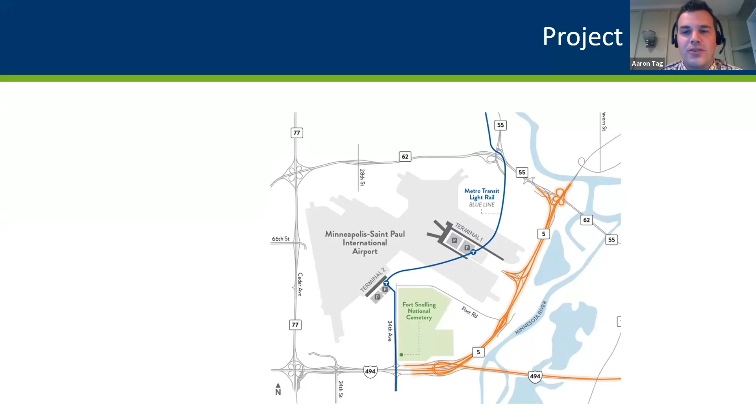This is on Highway 5 between 494 up to the Minnesota River. On the northern section of this project, we're doing what we call a concrete overlay, or reconstruction, of Highway 5 in both directions. This is a long-term fix. This will put down new pavement that will have long longevity. Overall, it'll last 40 to 50 years, and it'll be a good couple decades before we really have to be back in this section doing preservation work. And when we do that preservation work in the future, it'll be much less invasive than what we're doing this summer.

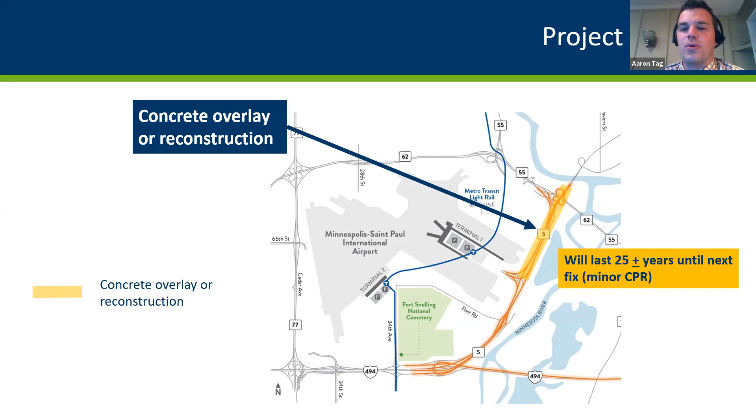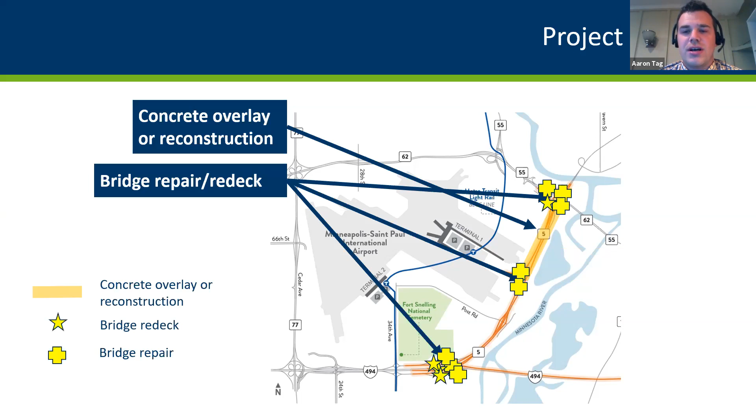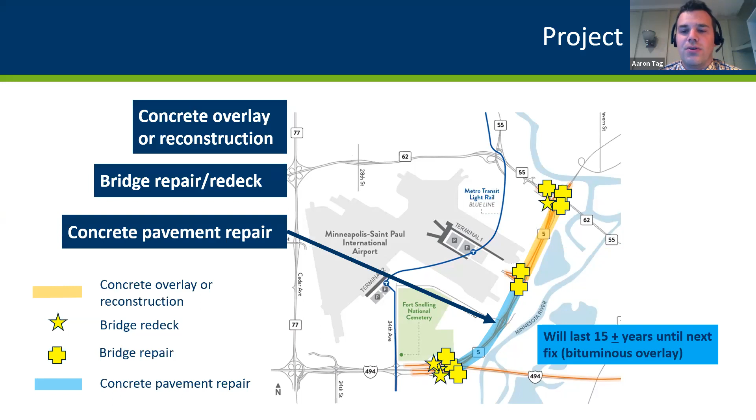We also have a lot of bridges we're working on along this corridor — 12 bridges that we're either doing repairs on or redecking. Redecking is when you take off the entire driving deck of the bridge and replace it with an entirely new one. On the southern end of the project, we're doing what we call concrete pavement repair, going out and making spot repairs to the concrete pavement that's out there. This will give us another 15 years plus or minus of pavement life before we have to come back for another preservation project, which will be a bituminous, or asphalt, overlay over this section.

As of last night, we have moved into the second stage of our project. From a traffic standpoint, it will feel very similar to the first stage for anyone who has driven on Highway 5 over the last couple months. Eastbound Highway 5 will continue to be closed from 494 across the river. The change that occurred last night is that now, if you are headed westbound on Highway 5 across the river from St. Paul, you won't have connections to Highway 62 anymore.

So if you head across Highway 5 across the river, you'll have to go all the way down to 494 to detour back to where you were intended if it was on Highway 62. If you're on Highway 62 headed westbound, you'll need to go to the interchange with Highway 55, Hiawatha, and essentially do a U-turn and come back.

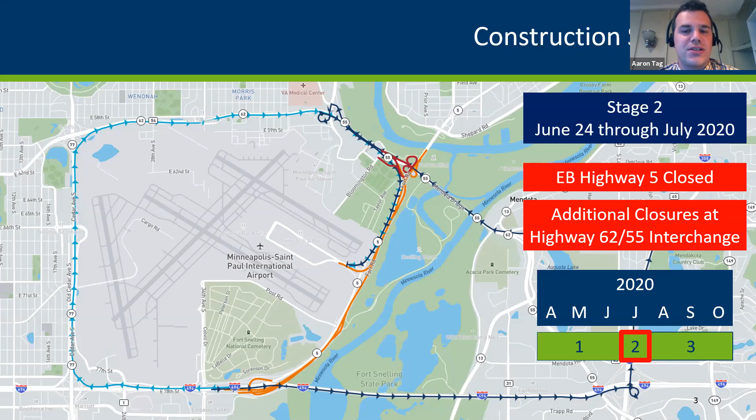The ramp from eastbound Highway 62 to westbound 5 will still remain open. This stage of the project is going to last about

5 to 6 weeks, lasting until late July or early August. Here's a couple recent photos from the project. On the left there is a bridge deck pour. So this is one of the bridges that is getting a redeck. You can see them pouring the concrete for that there.

And then on the right side, we have the concrete overlay. A lot of times when people might hear us talking about overlays, they might think of something we do more commonly, which is an asphalt mill and overlay, where we take off

a couple to a few inches of asphalt and replace that. With a concrete overlay, we are essentially building a new road on top of the existing road that's out there. So you can kind of see that in this picture there with the new 9-inch section of concrete on the right there that's white. And then on the left side of the picture there, you can see the old road bed that the concrete is getting placed on.

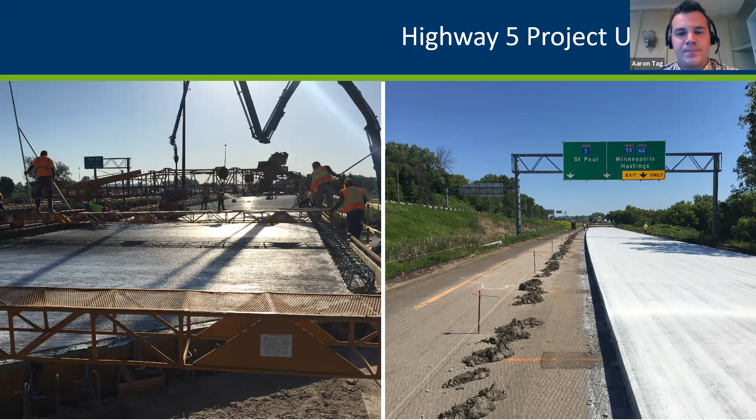As we move into that early August timeframe, we're going to move to the final stage of the project, stage 3. During this part of the project, westbound Highway 5 is going to be completely closed. So access will be changing so that eastbound 5 will be open. If you're going to the airport or leaving the airport, you will have to use eastbound Highway 5 for your access for the airport.

Another change that will be happening during this stage of the project is that if you are headed westbound on 494, you won't be able to access 34th Avenue. That ramp will be closed for one of the redecks. You'll have to go down to the next exit and do a U-turn, similar to what's happening up on 55 and 62 right now. Do a U-turn and come back to 34th.

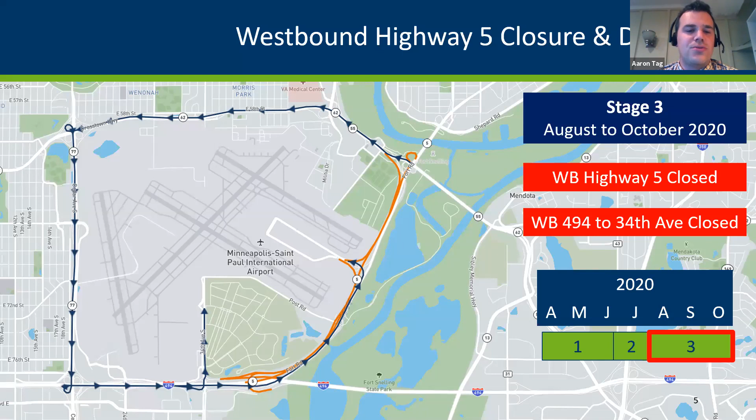So I kind of mentioned at the get-go that we really expected this to be the project of the summer, getting a lot of attention. It hasn't got as much attention as we originally thought it would, just because there's so much less traffic out there today. As we were planning the communications for this project, we were planning to tell people that they needed to give themselves an extra hour to get to the airport because of

increased volumes we were going to see on 77 and 62 and 494. So this is a little graph here. I got 3 of these. This one's Highway 62,

comparing volumes this year versus the same day last year, so in 2019. So you can see in the peak, we were down 70 to 60% down from our volumes in 2019. We've climbed back, so we're now more in that 20 to 30% decrease from last year. With this project, we were expecting those volumes on 62 to be a 30 to 40% increase.

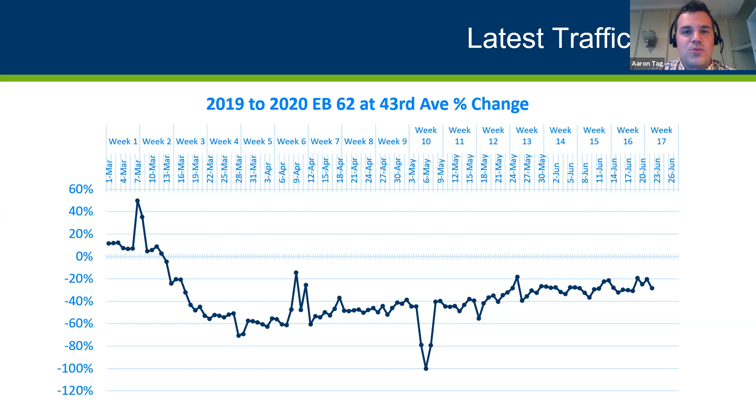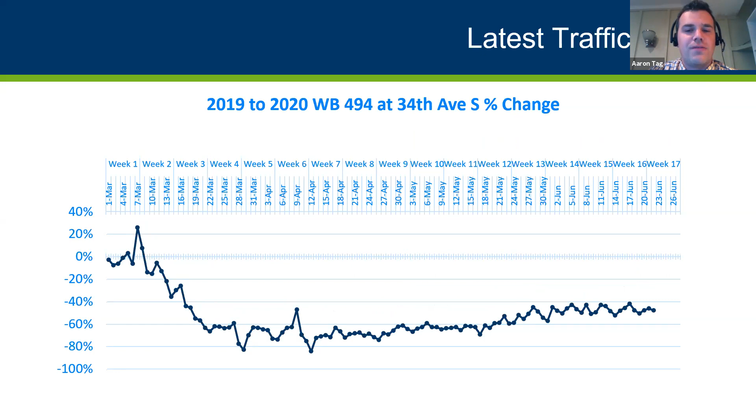So this is information for the project. You can go to our website to get the latest information, aroundtheairport.com. While you're there, you can sign up to get email alerts, get the weekly email on what is happening with the project and what you need to know. If you have any questions, you can always feel free to contact us through the website or use the email listed there.

And now Molly is going to talk about the 494 pavement and bridge project.

Thanks, Aaron. Yep, I'm Molly Kline. I'm a South Area Engineer at MnDOT, working on the 494 and 35W bridge project. So we'll give an update on both of those.

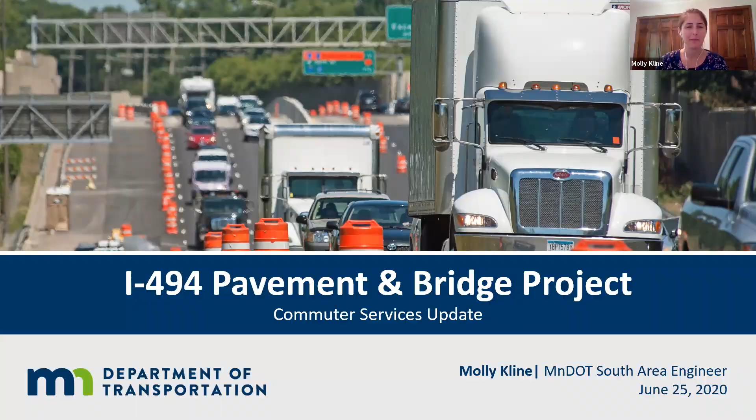So this project on 494 was actually a combination of 2 separate projects. Between Blaine and Hardman Avenue, we worked on last year, and that is now complete. So we added bridge work. We widened and resurfaced the Concord or Highway 156 bridge. We replaced those bridge joints. We added an aux lane on westbound 494, put up some noise walls, and repaired the pavement in that area.

So that work is now complete. And we are now working on pavement restoration or preservation on 494 between the Minnesota River Bridge and Hardman Avenue. That project includes resurfacing and replacing joints on the 494 and 35E bridges.

We are repairing the pavement between 3rd Avenue and the east side of the River Bridge. If you'll remember, that pavement was in terrible shape and really did need to be replaced. We're improving drainage in the area, replacing lighting, and we've added a turn lane, and we'll replace the signal at 494 and Pilot Knob. The benefits of these two combined projects are improved traffic flow and safety for commuters using 494 in this area. It extends the pavement and bridge life, and it improves drainage.

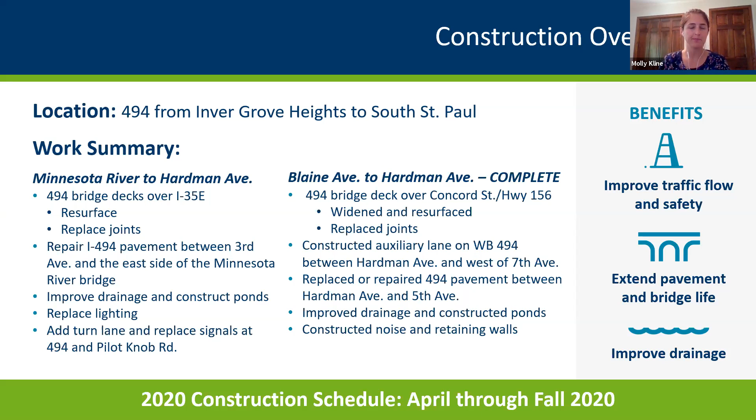Here are a couple pictures from that 494 job. If you'll remember, before we started the preservation work, the lane lines or pavement joints were deteriorating very rapidly. So for this pavement restoration project, we implemented what is called echelon paving, where we run multiple pavers in a single direction of traffic to eliminate those cold joints where the pavement comes together. This project did implement that echelon paving, and it eliminates half of the cold joints that were out there previously, extending the longevity of this pavement.

The photo on the right side of the screen is one of the bridge joint replacements. They actually cut out the joint and will replace it. It looks fairly scary in that condition, but it is being repaired and replaced, enhancing the longevity of the whole bridge, not just the bridge joint but the bridge itself, with that work.

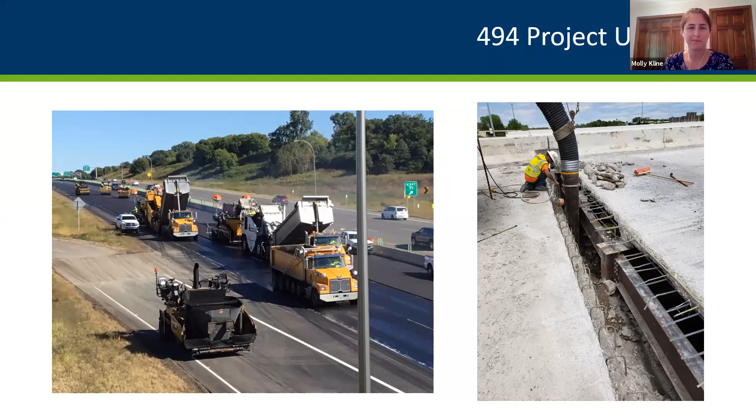So the remaining work—we got a lot of pavement work done last year. The one section of pavement that remains to be mill and overlaid is highlighted in green on this graphic, on the far west side between the Minnesota River Bridge and 35E. We will be coordinating very closely with Aaron's project on Highway 5 that he just mentioned. He mentioned that they'll be going into stage 3 here in August. As soon as that project transitions into stage 3, we anticipate working on the eastbound direction here. So right now we're tentatively scheduled for the first two weekends in August.

This section of pavement will require a full closure. There's also some drainage work that needs to be completed in this area. So the full closure will detour traffic on eastbound 494 to highways 77 and 35E. Again, we will not implement that work until the Highway 5 project is done using that direction as their detour route. Circled in red here are the bridges at 35E that continue to be worked on. We started that work last year and that will continue through this fall.

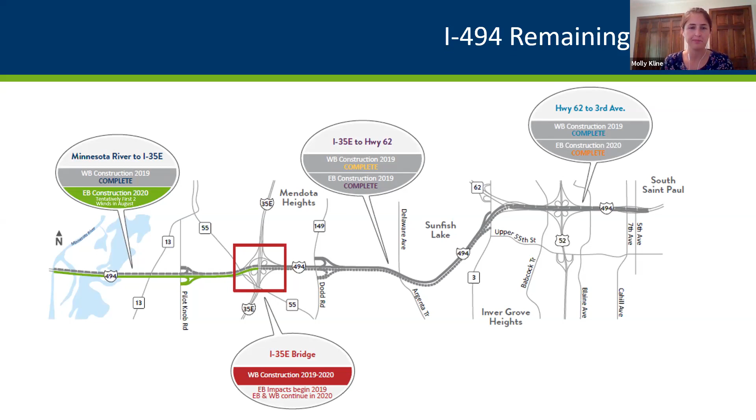On to the 35W River Bridge. With this project, we've partnered with Dakota County, Hennepin County, Bloomington, and Burnsville. We're replacing bridges and pavement from 106th Street to Cliff Road. This was a very big project—we started it in August 2018 and it will continue through November of 2021. It has a number of benefits, including safety improvements for vehicles, bikes, and pedestrians.

There's improved connection for bicyclists and pedestrians across the river, with the new bridge having a dedicated pedestrian and bicyclist facility on it. We are raising 35W south of Black Dog out of the floodplain, so we will be less concerned about flooding affecting that section of 35W. We're upgrading drainage and providing a smoother road surface.

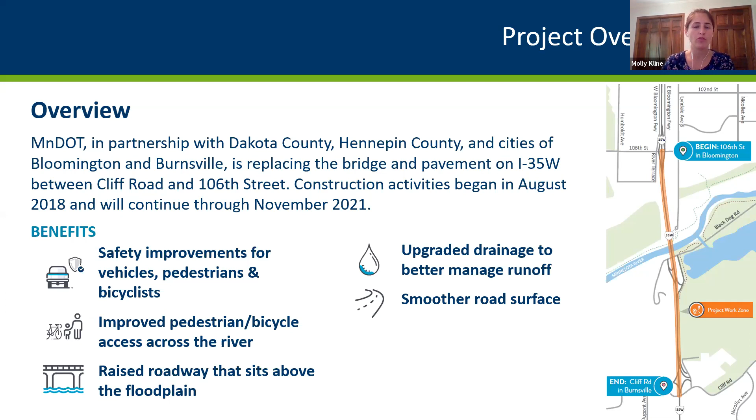As I just mentioned, we are reconstructing the 35W Minnesota River Bridge—there are actually two bridges there. We are reconstructing the 106th Street Bridge, and replacing the pavement from Cliff Road to 106th Street. We've constructed a northbound auxiliary lane between Cliff Road and 106th Street, and constructed a multi-use trail over the new river bridge, connecting to Lyndale Avenue as well as Black Dog Road. There isn't a new pedestrian trail along the full limits of the project, but there is that facility across the river now, connecting to already-in-place facilities on either side. We are also improving signing, lighting, and drainage within the project area.

So, community impacts: if you live near the river, I'm sure you've heard construction and you will continue to hear construction noise. We do have nighttime work going on, between 7 p.m. Sunday and 6 a.m. Friday—each night there could be work going on. We also will have overnight lane closures, so 35W may be reduced to a single lane of traffic after 10 p.m. each night in both directions to facilitate more of that construction that needs to occur.

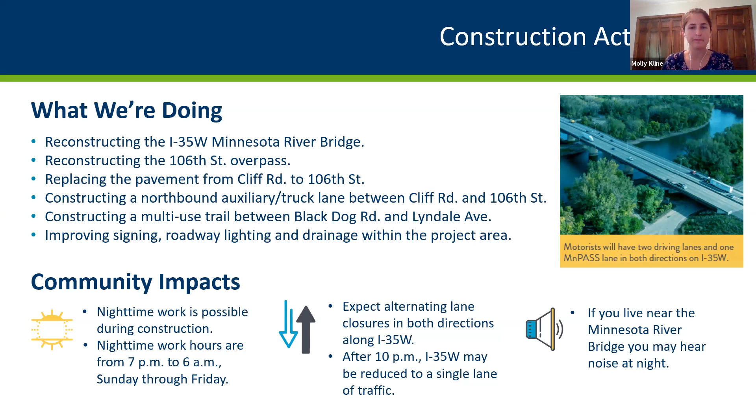There are currently a number of ramps that are closed. The ramps to and from southbound 35W at Black Dog Road are closed through the fall of 2020. The ramp from 106th Street to southbound 35W remains closed through the summer of 2021. And the ramp from southbound 35W to Cliff Road is closed now through early fall.

There are also some lane alterations anticipated with the remainder of this project. These lane alterations and closures are possible in both directions overnight, from 7 p.m. to 6 a.m. If you would like to exit at 106th Street, please stay in the right lane to do that. And southbound MnPass is and will continue to be separated from the general traffic between 106th Street and Cliff Road.

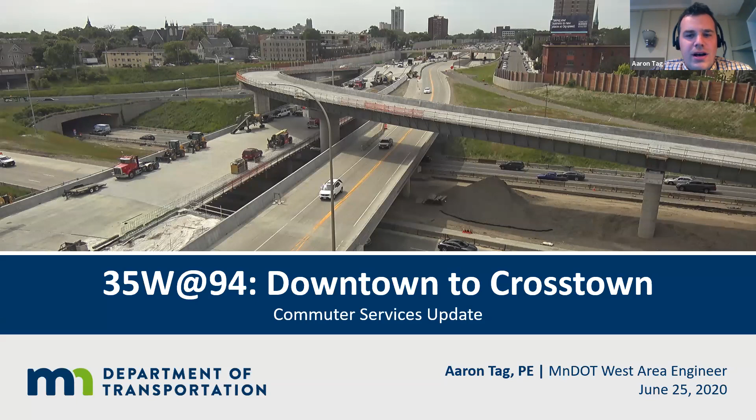So the next project that I am going to touch on is the 35W at 94 downtown to Crosstown project. This project also had a major milestone this week. Overnight on Monday and Tuesday night, the project started moving into stage 5. This is a long project, we're now about 3 years into it, and we've now moved into the final stage, just over a year before this project is going to be all finished up.

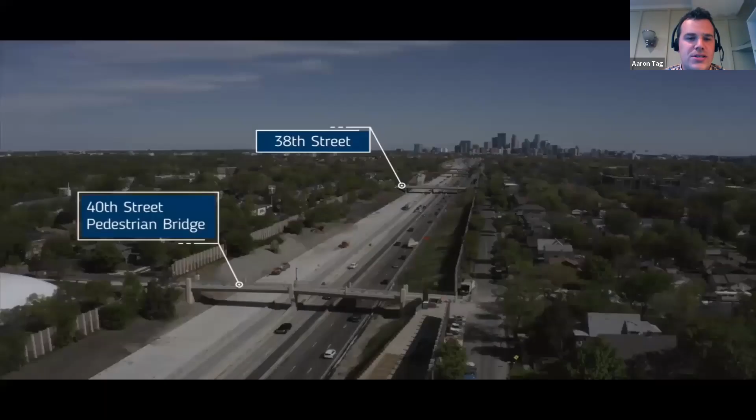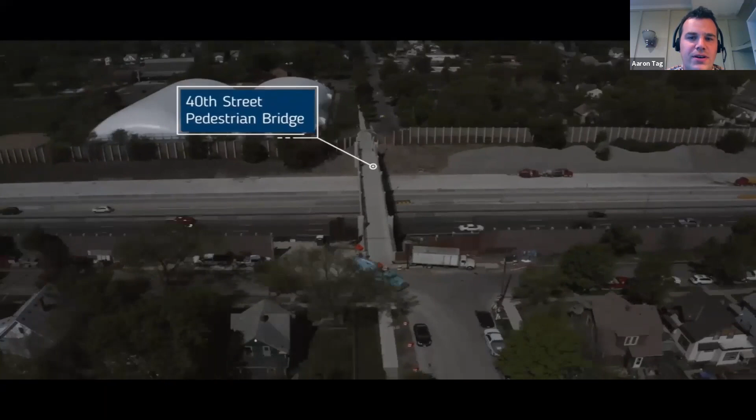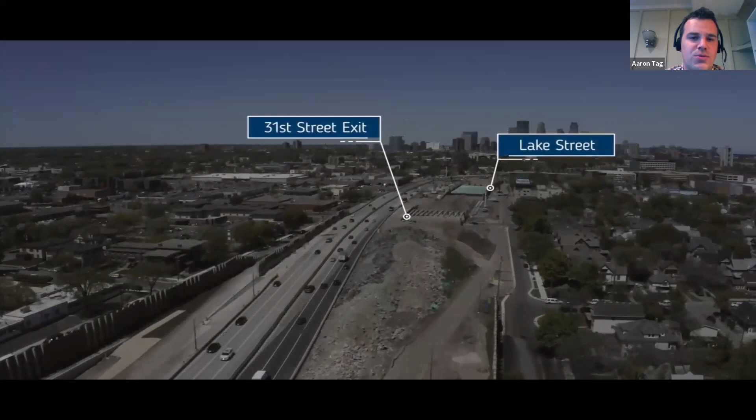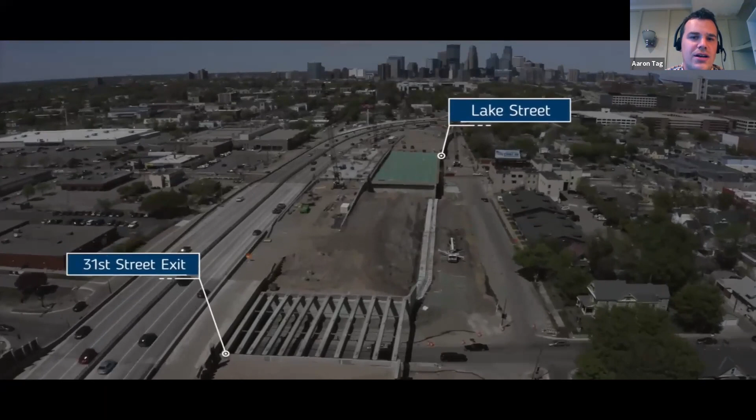This here is a little drone video, recent drone video of the corridor with the switches that happened overnight this week. Southbound traffic moved more to the west of the corridor. You can see the wider pavement previously and on some of that drone video. So that's where the southbound traffic is now. In this shot you can see the Lake Street area, and in between kind of where the traffic is and where that green bridge is, you see some work going on, and that's for the new Lake Street transit station. So a big component of this project is the transit improvements, and as this summer moves on, you'll start to see that transit station start to form more.

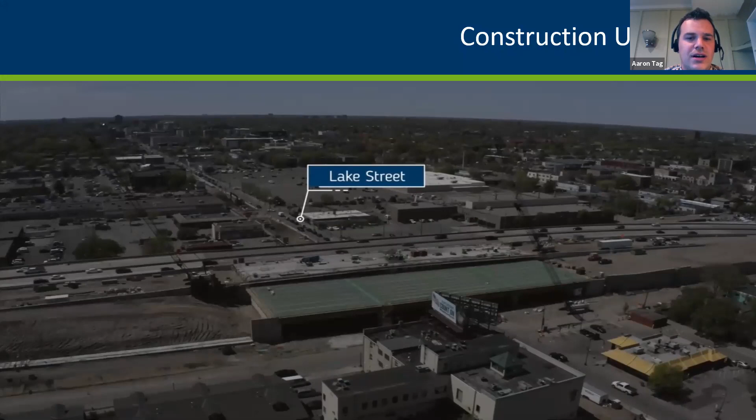Things that you can expect to change this year, a lot of them are already done or in the works. On the north end of the project, you may recall that we opened the entrance to 35W southbound out of downtown from 5th Street and 4th Avenue early, 2 years early, last year. When we opened it, we said we had a little bit more work to do and would need to close it at some point. So we closed that this spring and plan to have it back open sometime midsummer this year, back open to traffic coming out of downtown Minneapolis.

On Lake Street, we are reconstructing Lake Street as part of this project between Blaisdell and 5th Avenue. That will be 2 construction seasons to get that work done, doing about half the road each year. That work started in April of this year.

And then as we moved into the 5th stage of the project, traffic has now shifted over to the west side of the corridor. So they're going to start working on tearing up the east side of the corridor, the last part of the old pavement that hasn't been torn up and replaced.

One thing, if you travel this corridor, you might remember that if you were southbound before, when you got to around Lake Street, you had to decide whether you wanted to be in the 2 left lanes or the right lane, as traffic was divided between what will eventually be the center median barrier. If you had wanted to go to the 46th Street exit, you needed to be in the right lane for that. With the traffic switch that happened, it's now affecting that northbound traffic. So there's 2 lanes on the left of the median barrier and one lane on the right headed northbound. You don't need to worry, there's no exits you need to be concerned about along this stretch, so it doesn't really matter too much what lane you are in.

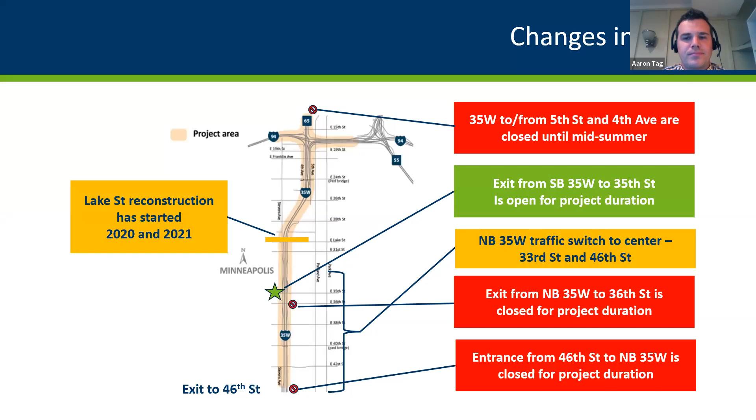Another project related to the 35W@94 project is a big drainage project that we have going on. This is a project to reduce the amount and frequency of flooding along the corridor. You may have seen on the news in the past, frequent flooding events happen down around 42nd Street. So we are building 6 huge underground storage tanks that during extreme rain events, water will flow into these tanks and be stored until the rain subsides, and then will be pumped back into the storm sewer system. This will help reduce the amount of times that we see flooding on the freeway here.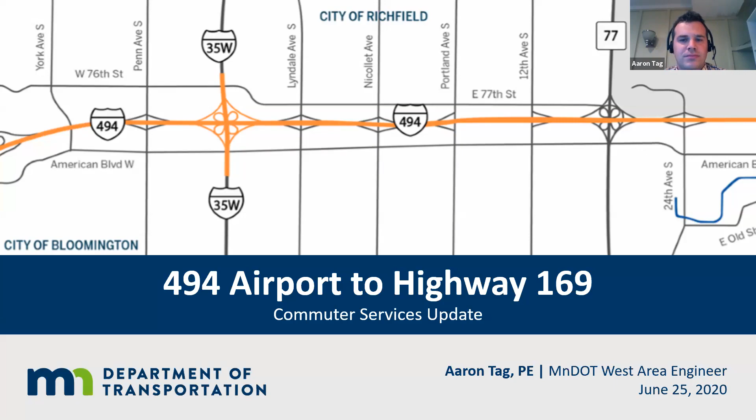The last project I'm going to briefly touch on is the 494 Airport to Highway 169 project, under development in the southern part of the metro. This project looks at 494 from 169 to the airport, developing a vision for this corridor. They're currently working on finalizing what that vision is.

There's a number of components to it, including rebuilding the interchange at 35W and 494, changing some of the access to 494 east of that location, making a full access at Portland Avenue and eliminating the access at 12th and Nicollet Avenues, and looking at constructing additional lanes for all motorists 18 hours out of the day, and whether MnPASS is an option for other times of the day.

So they're currently going through the environmental and design process of developing that vision. Out of that will include figuring out what a first phase of this project might be. They're working on finalizing that information, with construction expected to start in the 2023 timeframe for that first phase of the project. Future phases beyond that first phase are still undetermined, and will happen as money becomes available for them.

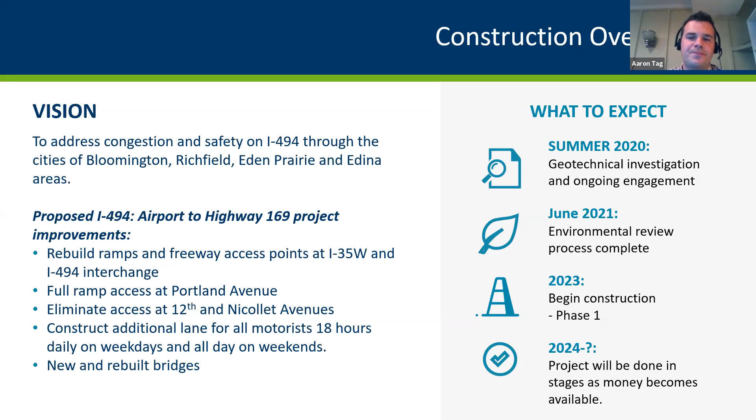And with that, that concludes our presentations. So I think now we're going to open it up for question and answer.